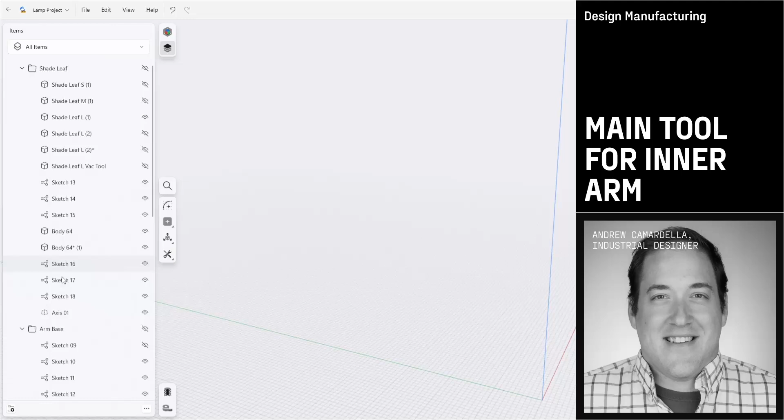And we're going to get back into working on this arm. And if you remember, we had an inner and an outer arm. We're going to primarily work on the inner arm section because that has the most work. The outer arm is something that's going to be applied afterwards, and we'll just trim to match.

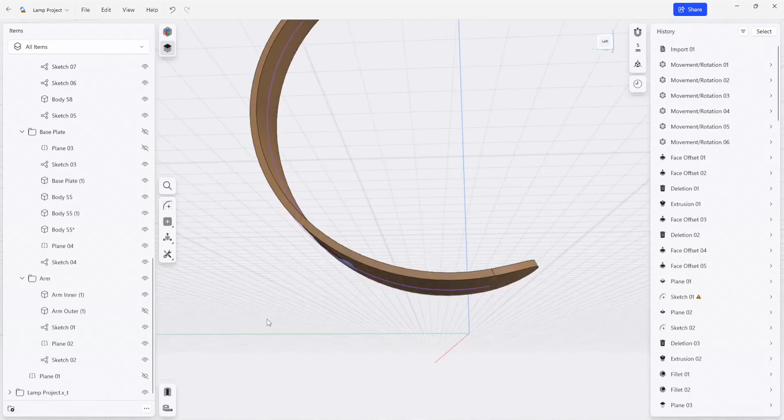So I'm going to hide the outer arm. We're just going to take a look at this arm here. So the first thing that we're going to do is make a tool that's going to help us lay up a series of veneers. And the thing that we're going to focus on is making a tool that allows us to make a sheet of material in this overall C shape that is the total width, and we'll trim away the extra material as we move along.

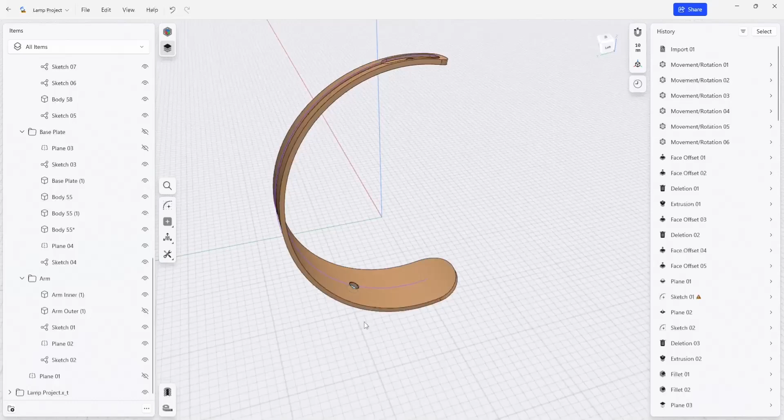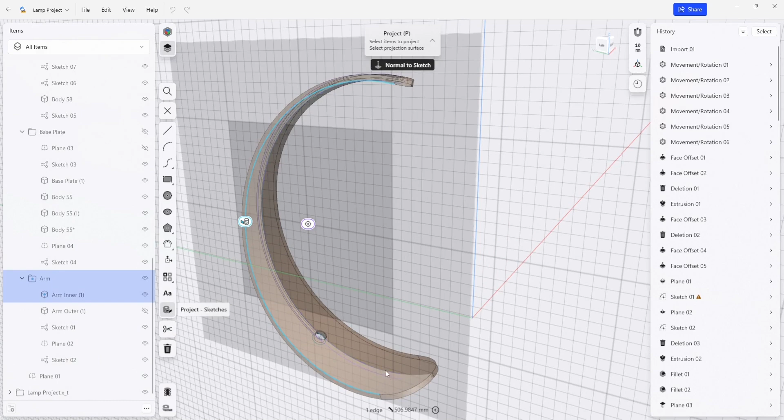We're going to start using this plane again. We're going to make a new sketch on it, and we're going to sketch the profile of this body. And I'm going to use a project again. We're going to project some edges onto that surface. And that way we have the overall inside shape of the lamp body. And I'm also going to use the outside edges here, like this.

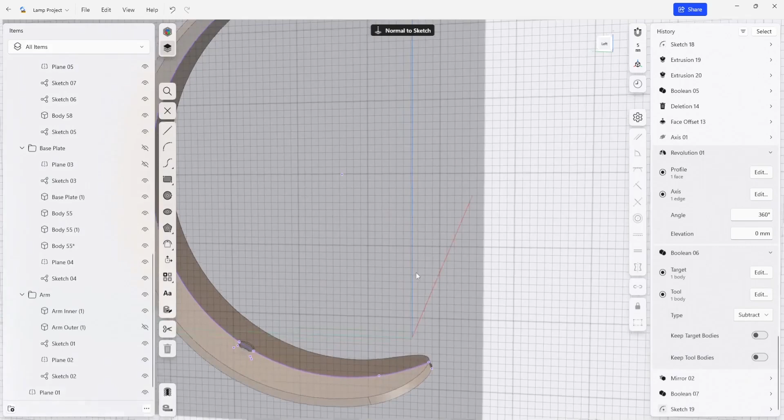And I am going to extend some lines out here because when we make a wood bent component, again, we're going to want to have a little bit of extra material on the front and the back edge, on the ends of this C shape, so that way we can clamp it and make fixtures and things like that that can be keyed to the lamp.

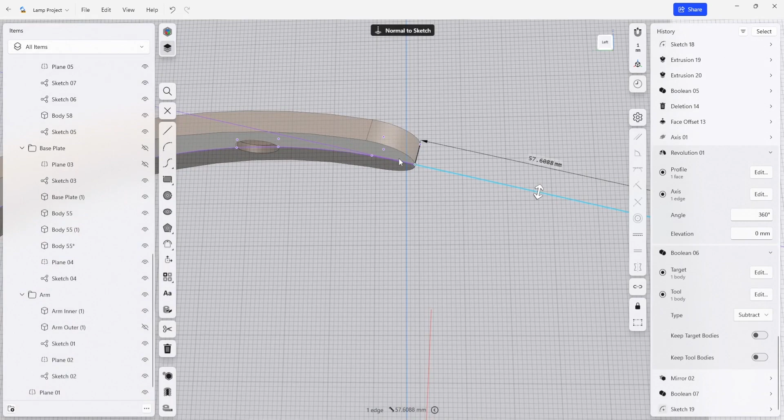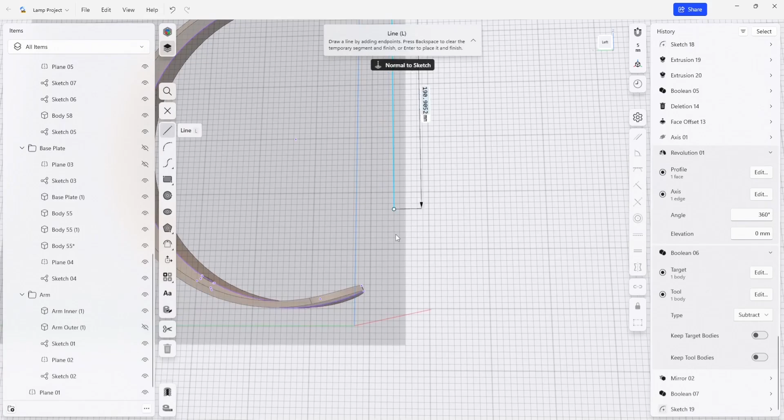So I'm just going to select these two lines here, and I'm going to make them tangent. And I'm just going to make this a round number again. 50 millimeters seems fine. That gives us a little bit of extra room to play with. And I'm going to do the same thing over here on the bottom. And I'm just going to make this a vertical line and then connect it back to the lamp shape, like that. And I'm going to make this tangent as well.

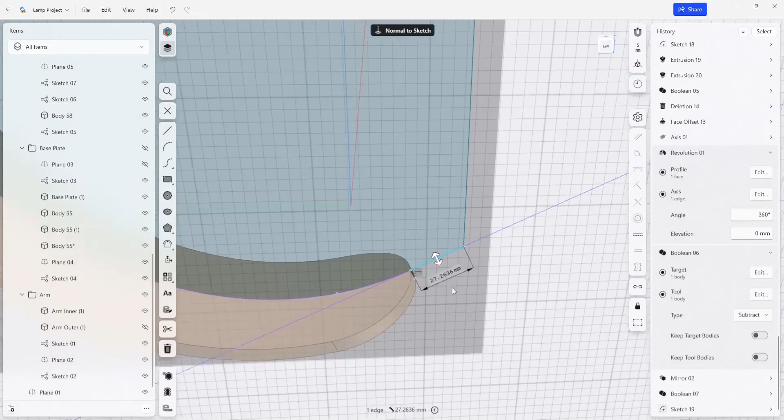And I'll make this line vertical. So this gives us not as much as the other edge on top here, but that should be enough for our purposes. So this is just a straight tangent line off the front.

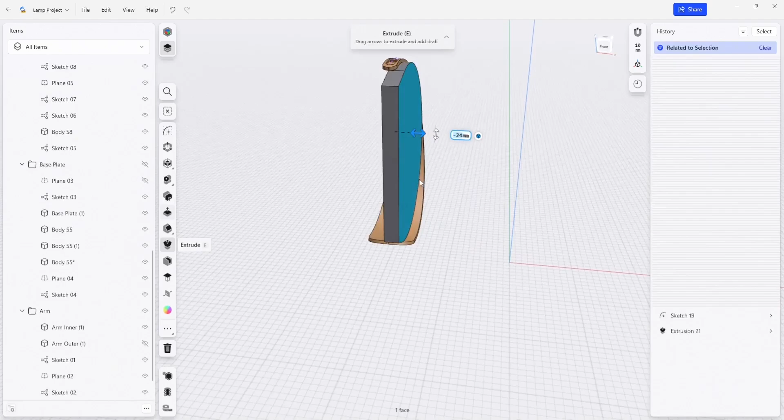And so what we're going to do next is we can hide this plane for the moment, and I am just going to extrude half of this part, and we're going to just extend it beyond the edge of this lamp. And it doesn't really matter how far it goes out, we just want to have a little bit of extra room to be able to, again, clamp fixtures and account for some misalignment between these sheets, so these sheets will be made wider, and we can work with that.

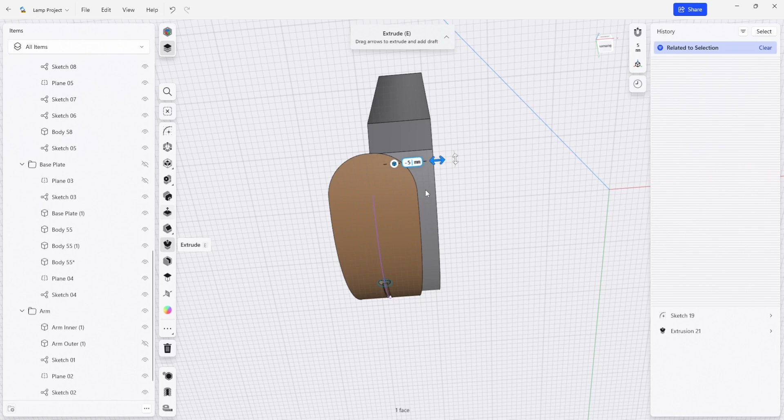So we're going to do a -50 for our part. And again, we'll mirror it over and make a copy and union it like we've done before. So that's our main component right now. We would laminate a bunch of pieces of wood, wrap it around this block, and then we could use a strap, or we could use a series of clamps to actually hold it all together.